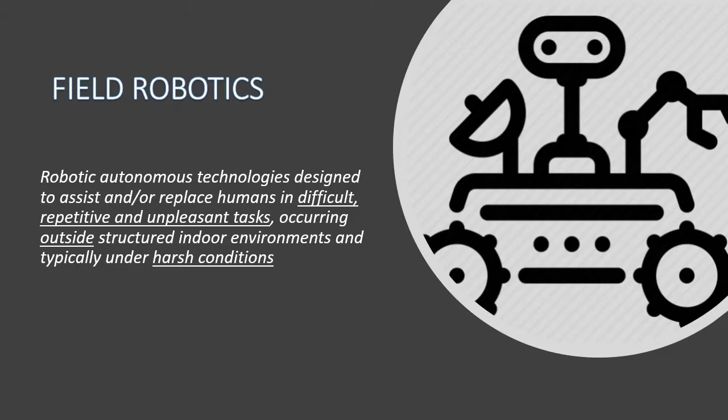Propelled by this experience, built in close collaboration with academia and stakeholders, the team possesses a unique perspective on the field robotics domain, which revolves around the development of robotic technologies for difficult, repetitive, and unpleasant tasks carried out outdoors and under harsh conditions. Agriculture, forestry, and constructions are only a few use case examples where field robotics has a role to play.

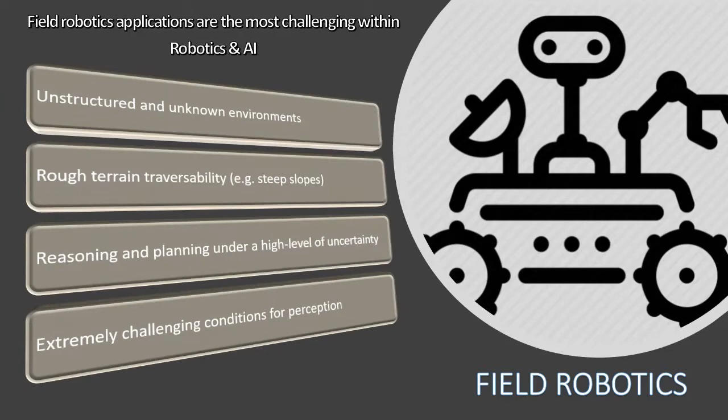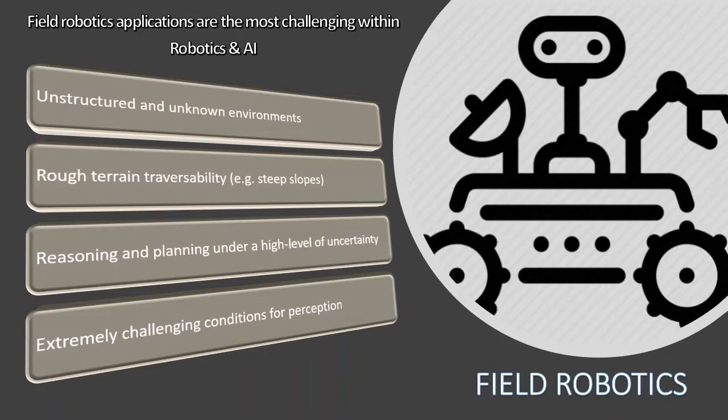And while robotics has been key in the fourth industrial revolution, or Industry 4.0 as they call it, these challenging domains have been left nearly uninhabited by robots. The reasons being the unstructured and unknown environment robots need to be deployed on, the rough terrain traversability inherent to such environments, the needed level of reasoning and planning under a high level of uncertainty, and the extremely challenging perceptual conditions faced.

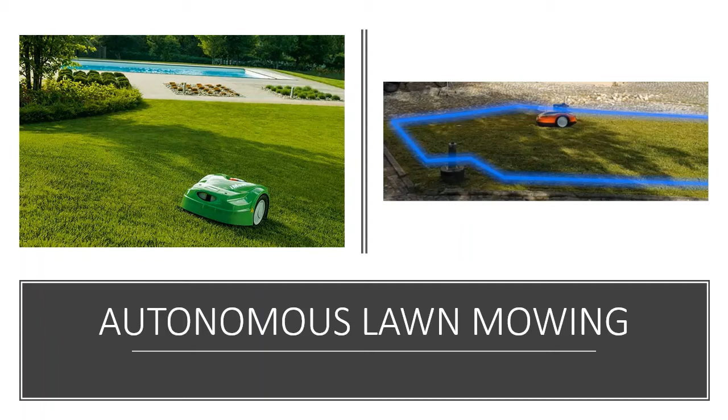I had the opportunity myself to work on a series of projects within the field robotics domain, some harder than others. These include the development of pervasive localization architecture for autonomous lawn mowing, path planning and navigation for autonomous solar panel cleaning, leader-follower architectures for aquatic robots, and the most challenging one I had the pleasure to work on, at least until now, the development of forestry robotic systems, be it for the removal of forestry fuel for wildfire prevention or the removal of undesired vegetation around critical infrastructures, including railways.

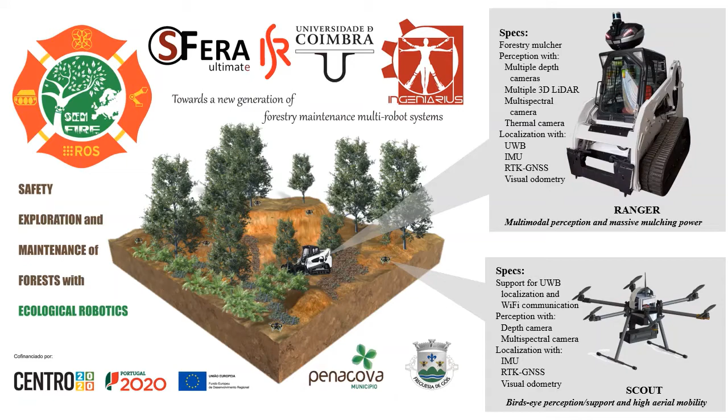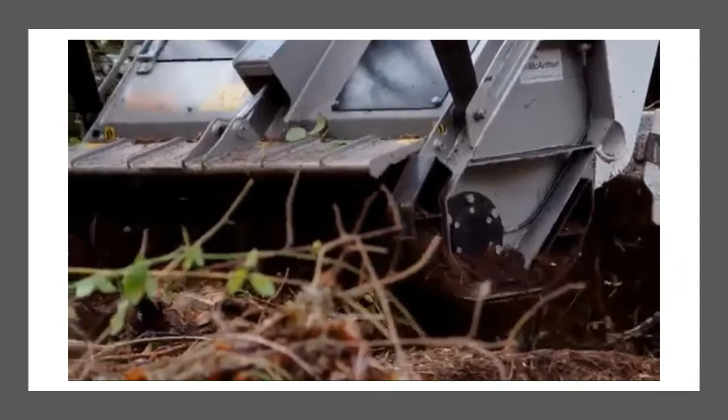Vegetation clearing is a quite demanding task, influenced by the irregularity of the terrain and the density and type of vegetation at stake. For these reasons, proper selection of the machine, including its attachment, is crucial and can lead to very profitable outcomes in the end.

Heavy-duty machines equipped with forestry mulcher attachments, such as compact track loaders, are capable of mowing down hectares of large brushes and even small trees with no effort in a few hours. This also implies that these machines are quite dangerous and safety measures need to be taken into account, especially when having autonomy in mind.

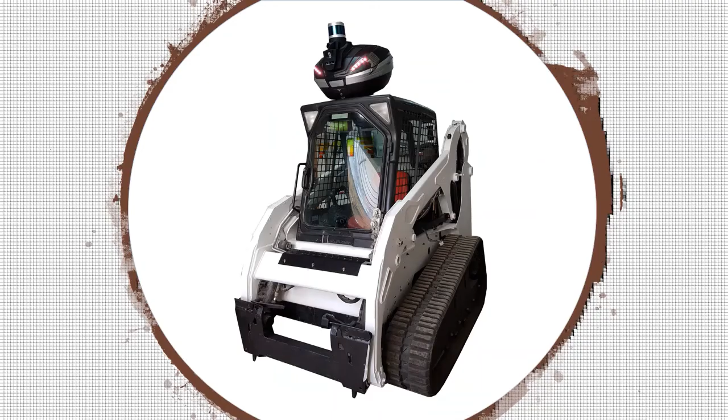In a nutshell, the core element of these projects is called Ranger. If we were to develop a disruptive, autonomous, and ecological machine like this from scratch, we would need to address several disciplines, ranging from the base ones, such as mechanics, electronics, automation, and even hydraulics, to the most advanced ones needed to achieve the necessary level of autonomy, such as mechatronics, computer vision, computer science, control, and naturally robotics.

For this reason, and even though the literature presents a few out-of-the-box heavy-duty robots, many are at low technology readiness level or are not all-encompassing at all. This makes it currently impossible to acquire a commercial robot capable to be deployed in forests and other challenging domains.

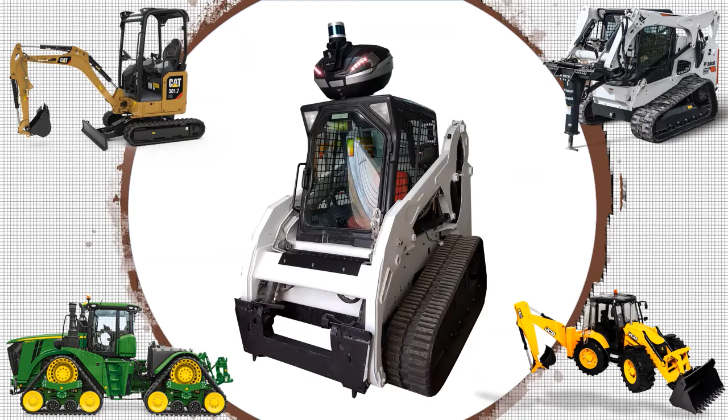The cost of developing in-house field heavy-duty robots, the lack of multidisciplinary teams involving end users and stakeholders, and the broadly adoptive passive nature of most envisaged solutions makes the current efforts insufficient to enable future market development.

Therefore, to bypass some of these struggles and introduce new solutions in the market faster, a step toward the right direction falls on the idea of developing plug-in solutions comprising sensors, controllers, and sometimes even new actuators, and applying those into existing heavy-duty machines. Nevertheless, to do so, a set of procedures need to be taken into account, starting with the understanding of how these human-operated machines actually work.

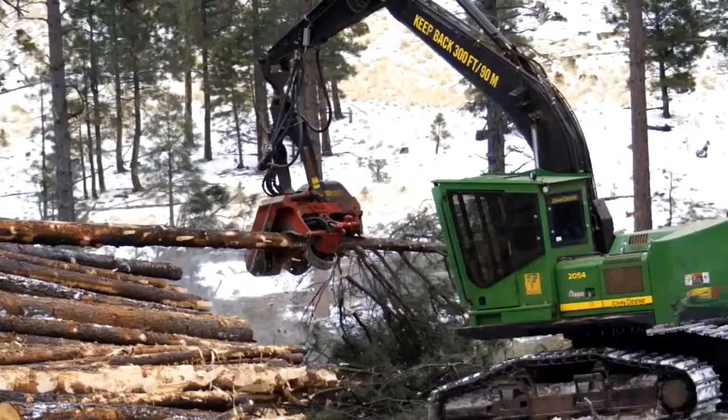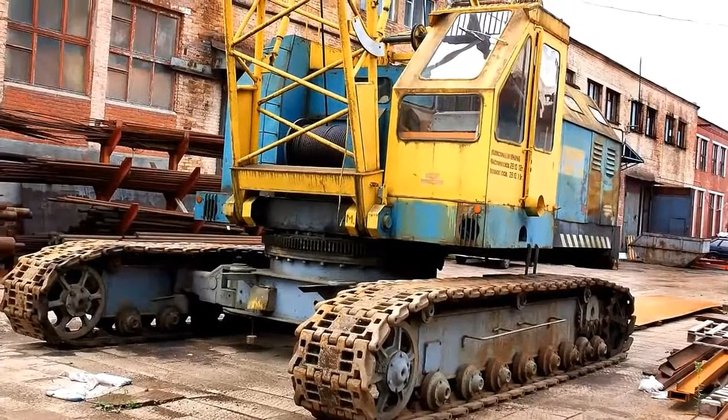Nowadays, heavy-duty machines such as trucks, buses, mobile hydraulics, and others are more automated than they have ever been in the past, just like our own cars. These are filled with electronic components. By understanding how these components communicate with each other, robotization is just one step ahead.

In the early days of controller area networks, or CAN for short, every device manufacturer interpreted messages in its own proprietary way. This means that Bobcat machines will be unable to communicate with John Deere ones and the other way around. However, the J1939 standard brought some order to this mess and reduced the development effort significantly by presenting itself as the most important standard in the heavy-duty machine industry.

With the wide adoption of these methods and the rise of heavy-duty telematics, J1939 has been playing an increasingly important role in the market for connected vehicles. One of the driving forces behind its worldwide success has been the increased adoption of electronic control units, or ECUs, which are the embedded systems within the machines in charge of controlling its electrical systems.

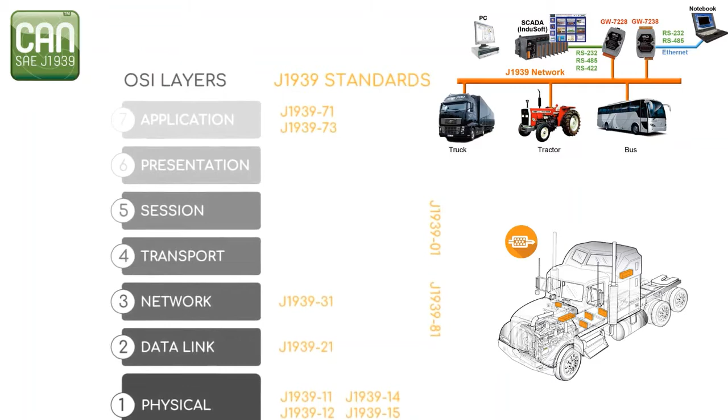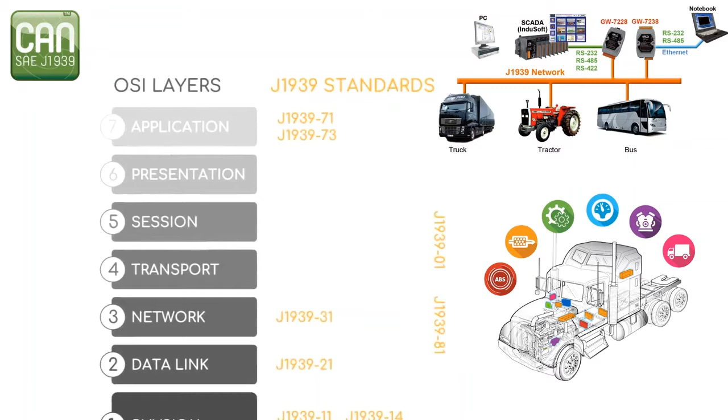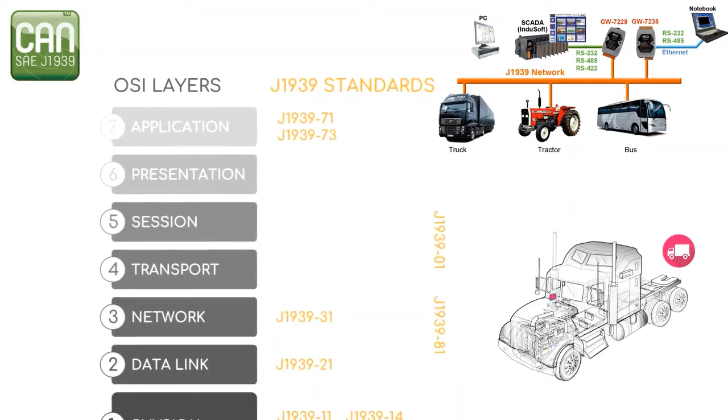Engine control module, powertrain control module, transmission control module, brake control module, central control module, and many others are only a few existing ECUs within a given vehicle, meaning that if they all speak the same language, the better. Because of its success, the J1939 standard defines more than 1,500 frames and more than 100 ECU IDs for highway, agriculture, forestry, construction, and marine equipment.

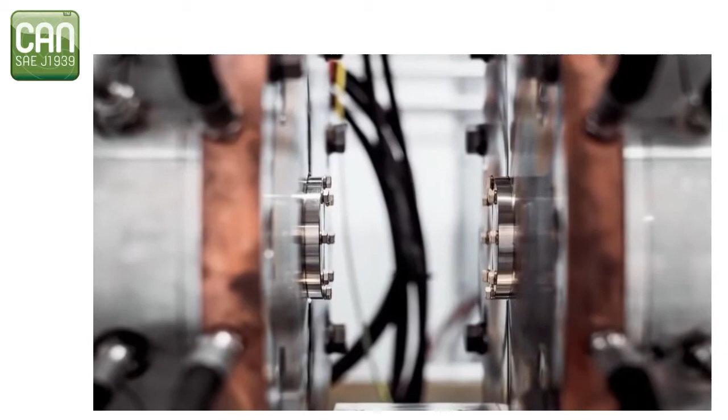In brief, J1939 is a high-layer protocol using CAN as its basis, but only considering a few layers of the 7-layer OSI model. The physical layer describes the electrical interface to the bus. The data link layer describes the rules for constructing a message, accessing the bus, and detecting transmission errors. At last, the application layer defines the specific data contained within each message sent across the network. For instance, J1939 frames may contain information about the engine speed.

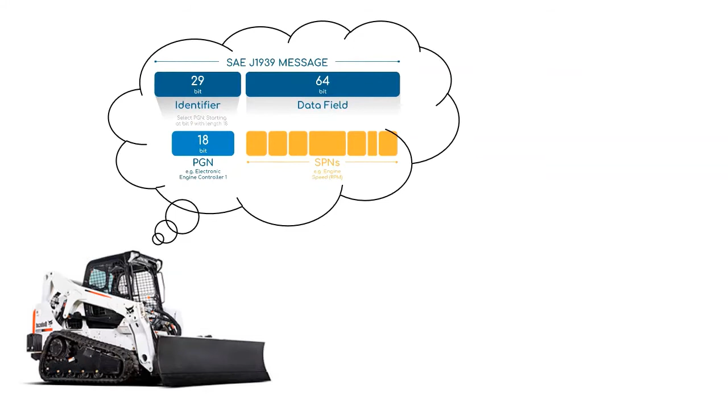And if we were to explain J1939 messages, we could state that those are basically CAN frames in the extended frame format, where the frame ID has 29 bits. Among these, we would be able to easily identify one of the most important elements in the message, the parameter group number, or PGN. The PGN serves as a unique frame identifier within the J1939 standard, which is often the same regardless of the machine manufacturer.

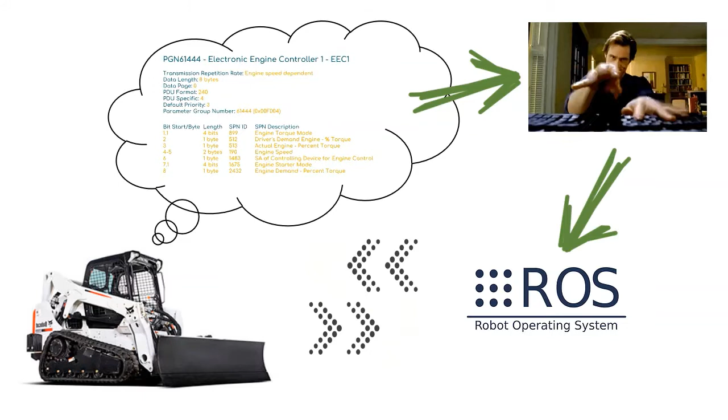For instance, the PGN 0F004, or in decimal 61444, is often used to communicate data regarding the electronic engine controller 1, presenting the actual engine percent torque and the engine speed. If we know this, then it is just a matter of time until we can fully understand messages exchanged between ECUs and, if robotization is the objective, to hack the system by introducing a new CAN-enabled component able to interpret J1939 messages and control certain units, such as the hydraulic systems and other actuators.

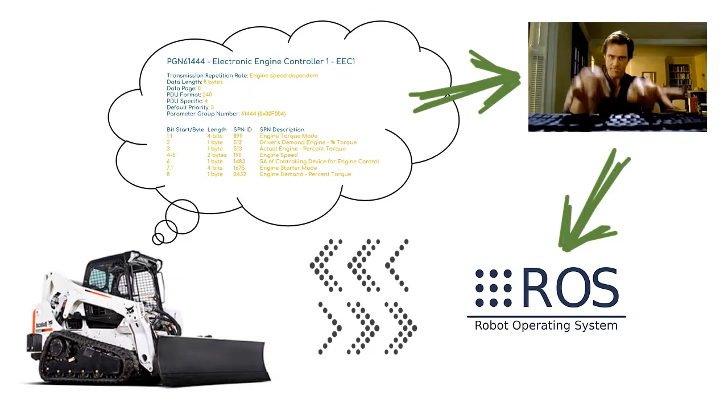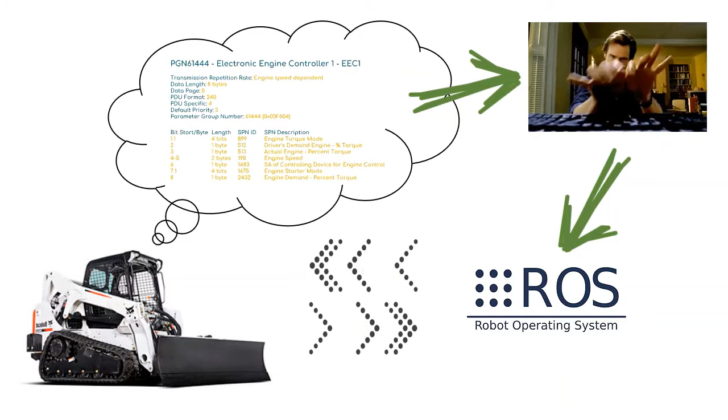Put differently, a bridge can be built between the J1939 standard within a given heavy-duty machine and robotic standards, such as the Robot Operating System, or ROS. Yet, being able to communicate with a machine is only a first step in its robotization. Human perception, cognition, and skills are hard to match, especially when dealing with unstructured and challenging tasks requiring adaptation and learning. Humans excel in analysis, intuition, problem-solving, and visual perception.

Furthermore, highly experienced individuals in the field can perform outstanding stunts hardly achievable by non-experienced humans and definitely not by the current state of field robotics research. For robots to match humans under these challenging domains, certain guidelines need to be employed when building this new generation of affordable field heavy-duty robots, prioritizing the research and technological developments revolving around the perception-action coupling. If humans are the center of this benchmark, then we should start from human-centered studies.

James Gibson, born in 1904, was an American psychologist and one of the most important contributors to the field of visual perception. One of his major contributions was entitled The Ecological Approach to Visual Perception, where he was highly critical of cognitivism over behaviorism, favoring direct perception and direct realism.

Gibson's theory of direct perception states that the environment contains all the information needed to specify its properties. Hence, perceiving these properties is a matter of detecting the information available in the environment. This bold vision at the time led many to follow his concepts and ideas, applying those to study how perception and action regulate human performance.

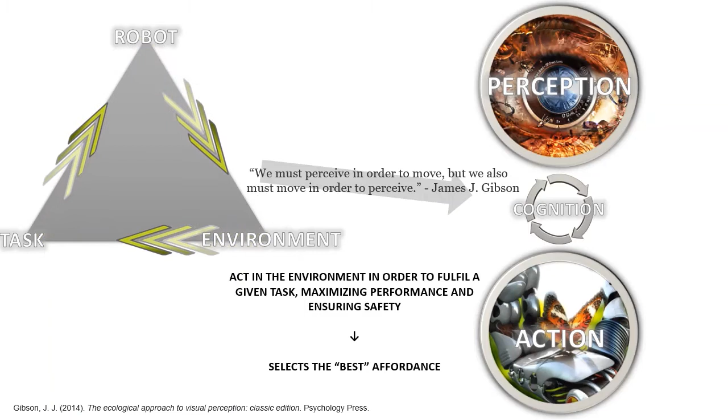Perception implies the ability to read the environment and extract information out of it, thus providing affordances or action possibilities to the cognitive system. The action then implies the ability to select the best affordance and act in the environment in order to fulfill a given task. Within a robotics perspective, perception is crucial for the decision-making, be it for path planning, navigation, and overall operation.

Artificial perception in robotics is intended to answer two questions: where am I, and what is that? Robots need to be aware about their location, and while it is easy to some extent on structured environments where artificial landmarks can be deployed, such as QR codes or even wireless beacons, the same cannot be stated for outdoor environments. GPS or GNSS-based technologies, when coverage is available, still lack the needed accuracy and precision.

Beyond localization, robots need to be able to extract information from the environment. Humans usually do this by exploiting their senses, including sight, hearing, touch, and smell. Roboticists have been highly active in the domain of biomimetics, and mimicking these senses has been one of their main challenges. However, existing solutions, including camera-based ones, still fall behind their biological counterparts, being susceptible to many sources of noises available in the environment.

If we were to divide the existing challenges in perception into categories, we could address sensing and perception separately. At the lower level, sensing is affected by the noisy nature of the environment. Each sensor is affected differently. Cameras and lidars, for instance, as optical sensors, are greatly affected by fog, rain, sun exposure, and others. Ultrasound sensors and radars can overcome some of these constraints, though at a higher cost and still with lower resolution and limited ability to extract information from the environment.

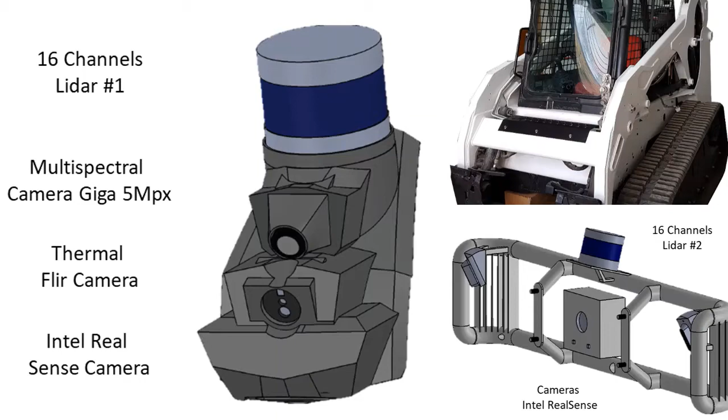It is not new that intelligent robots require a considerable amount of onboard sensors, often of multiple modalities, in order to operate consistently. The Ranger is not an exception, comprising 2 3D lidars, 1 multispectral camera, 1 thermal camera, 4 depth cameras, and 1 GPS module with real-time kinematics and 1 IMU.

The combination of the data collected by these sensors requires a transformation or projection of data from one sensor coordinate frame to another. Our approach has been seamlessly integrated with the ROS framework, allowing to deal with data association, be it through extrinsic calibration or manual assessment. Both sensors' placement and subsequent projection of the data from their coordinates to the robot was a critical step in the design of a filter, which fell on Kalman-based approaches.

Generally speaking, Kalman filtering uses a series of measurements observed over time and from different sensing modalities containing statistical noise and other inaccuracies, and produces estimates that tend to be more accurate than single measurements alone by estimating a joint probability distribution over the variables for each time frame. Among the many Kalman filtering variants, the extended Kalman filter, or EKF, is the nonlinear version of the Kalman filter, which linearizes about an estimate of the current mean and covariance.

In robotics, as in other domains, the EKF has been considered the de facto standard in the theory of nonlinear state estimation, navigation systems, and GPS. Despite this, it is important to state that the EKF is not an optimal filter, but rather it is implemented based on a set of approximations.

This means that, unlike the traditional Kalman filter, the EKF may diverge if the consecutive linearizations are not a good approximation of the nonlinear model in all the associated uncertainty domain. Nevertheless, as most systems are nonlinear, traditional Kalman filter is not even an option in the first place.

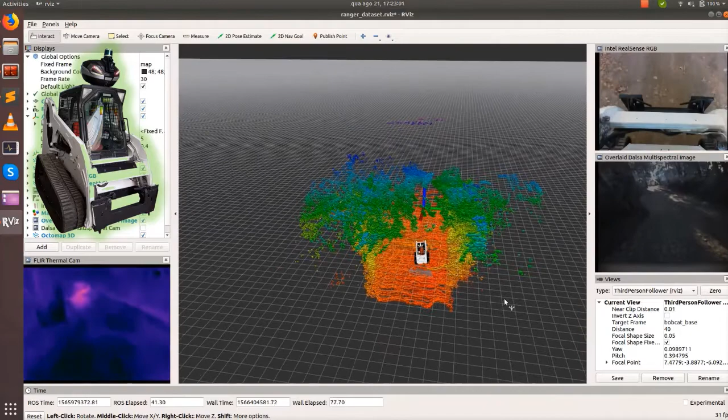This multimodal architecture has first been tested by deploying the Ranger in an unpopulated and unpaved road with surrounding vegetation, remotely operated from inside the cab, with the intent to extract as many datasets or ROS bags as possible for subsequent analysis. Several ROS packages have been tested, configured, tuned, and combined, wherein Cartographer, Robot Localization, and Octomap played a central role.

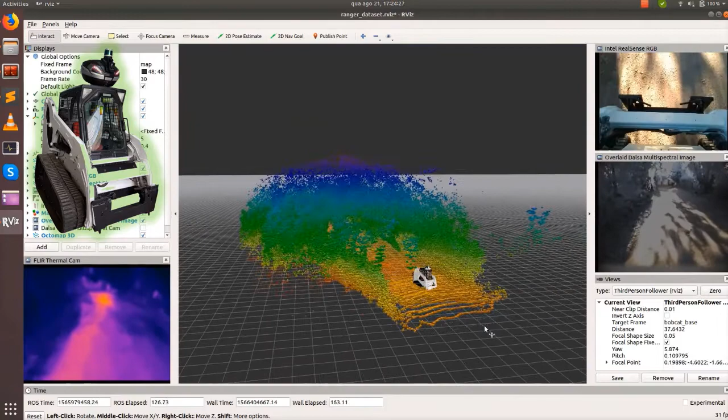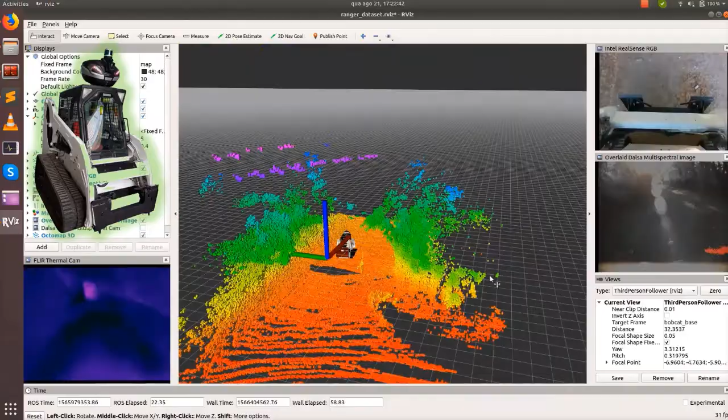Several experiments have been conducted to test the relevance of the different sensors in estimating the pose of the robot in the field and how each of the sensors affect the overall performance of the system. Both estimated trajectory and map generated by the robot were highly accurate, which allowed to go down the rabbit hole a little bit more. Instead of mapping general physical properties of the scenario with octrees, we have explored how to properly combine the elevation mapping and the traversability mapping ROS packages.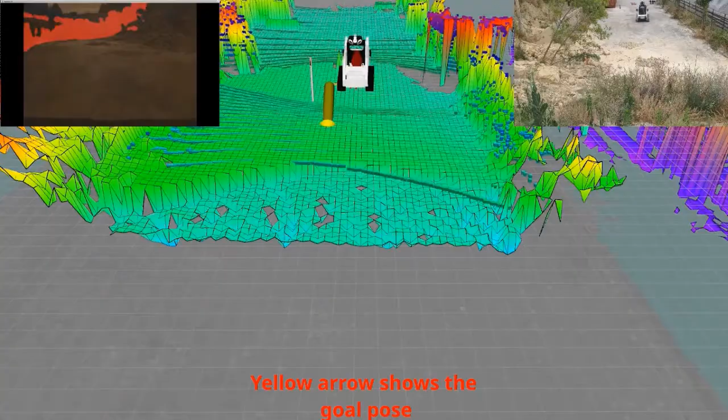The elevation mapping ROS package has been designed for navigation tasks, hereby improved by using the pose estimator and the multimodal sensing architecture previously addressed. The provided elevation map reflects the pose uncertainty that is aggregated through the motion of the robot. Subsequently, this map feeds a second layer, the Traversability Mapping ROS package, which has been designed to estimate traversability in rough, non-planar terrain, which is not a straightforward task.

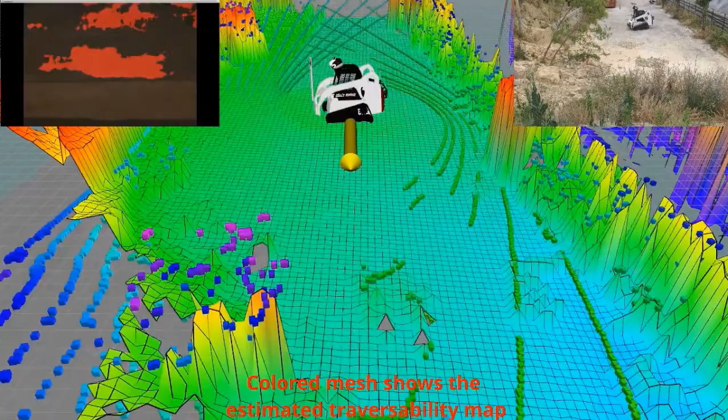The traversability of the terrain is estimated on the basis of a discrete 2.5D elevation map, wherein the terrain characteristics, such as slope, roughness, and steps, are extracted by applying different filters on the elevation map previously generated. To assess these new developments, the Ranger has been deployed in a new scenario that would allow for larger mobility.

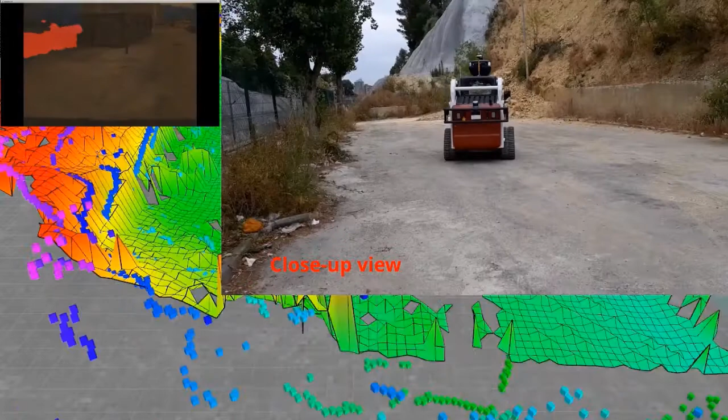At this stage, the Ranger was remotely operated from outside the cab, which is later explained in this video, with the intent to assess the traversability of the terrain, which, as it can be seen, continuously varied between fully traversable and hardly traversable or not traversable at all, from cold to hot colors respectively. You probably noticed that top left rectangle there, and you might be asking what this is, right? Well, this is exactly what takes us to the next step, semantic segmentation.

As noted, so far, autonomy has not been reached yet. First, we were driving the Ranger from inside the cab, and then we were operating it from afar. For autonomy to emerge, the robot needs to be able to extract meaningful information from the scenario and act accordingly. For that to happen, it needs to go beyond estimating its pose, analyzing the traversability of the scenario, or even mapping it. It needs to contextualize the data it sees. This is where semantic segmentation comes in.

For simplicity, we could say that semantic segmentation is like an upgrade over classification and object detection. For instance, methods for classification plus localization, or image localization if you want, allow to not only identify objects in an image but also their location. In case we have multiple objects present, we then rely on the concept of object detection. However, before detecting the objects and even before classifying the image, we need to understand what the image consists of. This is where semantic segmentation is helpful.

Images are not more than a collection of different pixels which are grouped together based on similar attributes by using semantic segmentation. Put differently, we could say that semantic segmentation models sort of create a pixel-wise mask for each object in the image, providing a far more granular understanding of the scene. As expected, deep learning methods are key for this to happen with the envisaged performance and in real time.

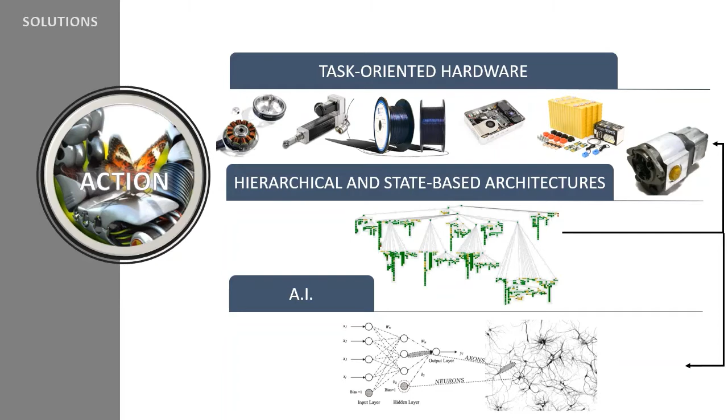During the development of the Ranger, as previously addressed, most of the actuators were already built in as part of the human-operated commercial machine. These include electric and hydraulic motors, yet feedback is key. This does not only imply exteroceptive sensors as the ones previously adopted for perception, but also proprioceptive, or put it differently, sensors designed to measure the inner state of the robot. The inclusion of encoders, inertial sensors, and inclinometers has been contemplated so that the Ranger is more self-aware, acting as critical components of the decision-making layer.

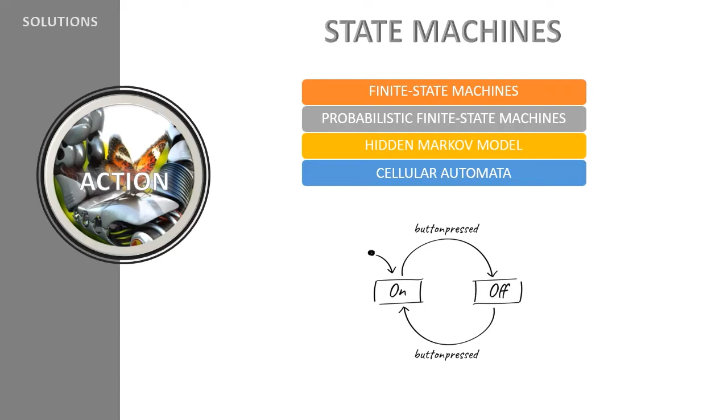These later fell on the use of state machines, the most common ones known as finite state machines, or FSMs. An FSM is one of many mathematical models used for computation, including decision-making systems. The FSM can change from one state to another in response to some inputs. A lamp that is currently in an off state is turned on by pressing a button, which triggers a transition to the on state. Regardless of the many types and variants of state machines, robots are intelligent systems that often resort to these models.

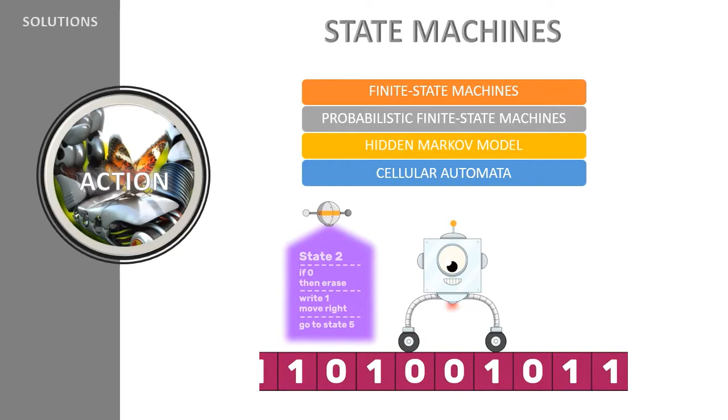It is unarguable that those models are very simplistic indeed, though still quite powerful, especially when combined with more advanced AI approaches. Let's take autonomous driving as an example. Even some of the most recent papers on the topic resort to FSM-based approaches. In the DARPA Urban Challenge, one of the most well-known competitions on autonomous driving, the Stanford junior team succeeded in applying FSM with several scenarios in urban traffic roads.

This does not mean that the FSM on its own is capable of dealing with all the challenges found in the real world. However, states within the FSM can be significantly more complex, adopting other models, including other FSMs on their own, which can be transferred to other domains as well and integrated in other FSMs. For instance, we have developed our own follow waypoint state, similar to what can be found in autonomous driving or even unmanned aerial vehicles, though we have applied it for autonomous solar panel cleaning. Naturally, the follow waypoint state is more than a simple state. It is rather a collection of other states connected by transitions that are triggered depending upon many conditions.

For instance, if the robot is deviating from the next predefined waypoint, it should start rotating towards it, or if the robot's sensor senses that it might be near jumping off out of a solar panel, then it should enter a new state built to deal with this recovery mechanism.

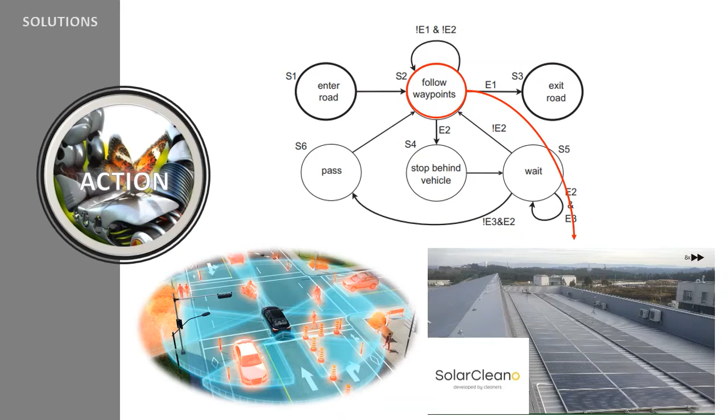Be aware that FSMs are far from being exclusive to robotics. Those have been adopted in many other domains, games being one of the most common ones. For instance, the Shambler monster from Quake has a little bit more than a handful of simple states. For instance, it spawns and enters an idle state.

While it doesn't detect the player, once it does, it enters an attack state, which can end in melee attack—the most common one, since the monster charges the player swiftly—or a missile attack in case the player is able to stay away from his melee range. Ultimately, either the player dies or runs away, which renders the monster useless and returns it to its idle state, or the monster dies.

Even though its FSM is still under construction, the Ranger can already choose from an interesting range of possibilities depending on specific inputs triggering transitions between states. The most obvious state is the one that enables the user to gain full control of the machine using a remote controller.

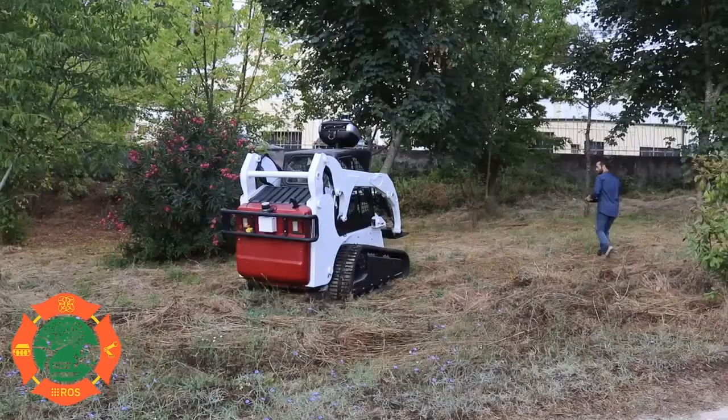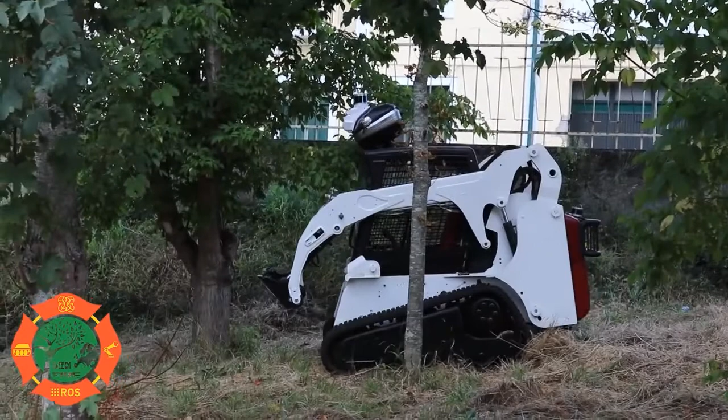Entering this state bridges the existing teleop ROS package with the J1939 protocol of the machine, allowing the user to control linear and angular velocities of the Ranger in real time from afar, just like from inside the cab. The FSM moving to this state whenever the user requests it is crucial, since it provides a way to safely interrupt undesirable situations during fully autonomous operation.

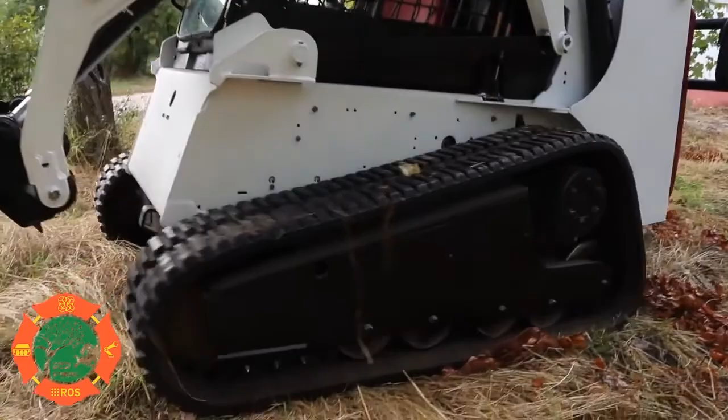S-Bus Radio Serial Communication Protocol has been adopted since it can support up to 18 channels using only one signal cable. The S-Bus is an inverted UART communication signal, and while other protocols could be adopted, S-Bus is 3 times faster than most alternatives, including CPPM and PWM, making it ideally suited for fast interaction with the machine.

Remote operation seems pretty straightforward and far from the end objective, which is for the Ranger to be fully autonomous. Furthermore, if the plan is to remove vegetation from unknown scenarios, then some sort of reconnaissance should be targeted. This is where rapidly exploring random trees come in.

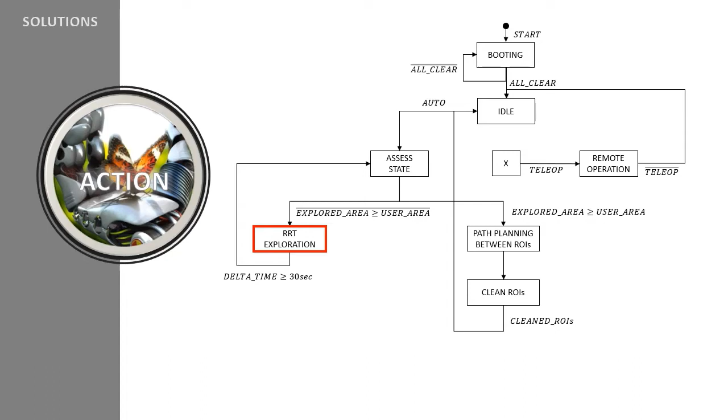For the Ranger to efficiently operate in forests, it requires a map of its physical properties, including vegetation to be removed. Autonomous exploration strategies often direct robots to unexplored space by detecting frontiers, or boundaries separating known space from unknown space. The RRT algorithm was chosen since it is biased towards unexplored and unvisited regions, ensuring complete map coverage. The Ranger integrates the RRT exploration ROS package, giving it the ability to use multiple RRTs.

The proposed strategy has been implemented and tested under both simulation and real-world experiments, and while current efforts aim solely at the Ranger, extending this exploration approach to multiple robots is inevitable in order to accommodate other agents as well, namely UAVs.

Here the principle is simple. After specifying 4 points as exploration boundaries, the Ranger starts its exploration routine, defining planning routes by taking into account the traversability analysis previously addressed. It is then only a matter of time until the robot is able to provide a reliable representation of the map, which can subsequently be fed to a new behavior, targeting, for instance, vegetation management.

The bottom line of this video is that field robotics is the most challenging subdomain of robotics, due to the need to operate in unstructured and unknown challenging scenarios. Common areas of application remain construction, agriculture, and forestry, though space robotics and underwater robotics are very good, extremely challenging examples as well.

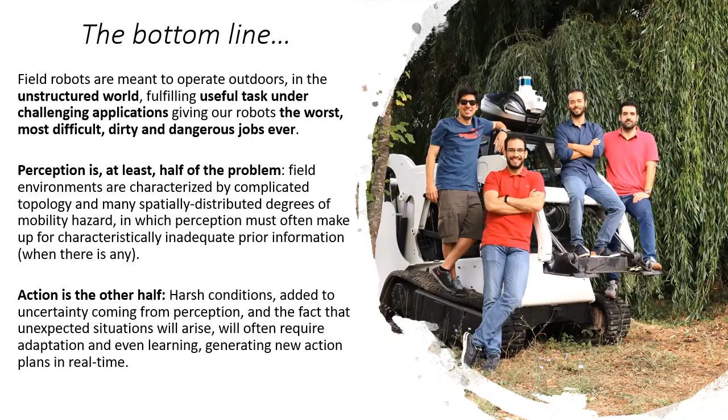And this is it. I expect this video offered insights on the guidelines we have been following for the development of affordable, heavy-duty field robots. The results achieved so far provide evidence that these guidelines can offer substantial benefits over in-house built robotic solutions. Thank you so much for your attention, and see you soon.